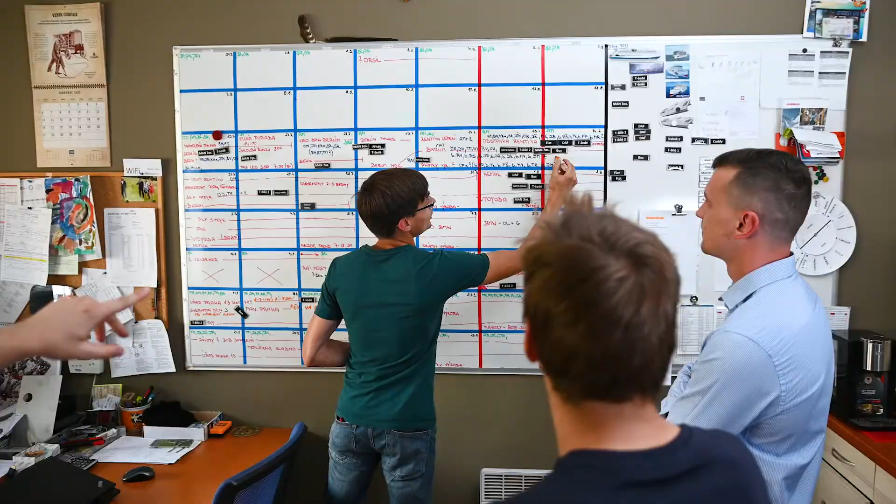We are Alkyon, a major European market player in the field of ventilation cleaning. We can handle any big project. We have a team of professional employees working in production plants, shopping centers, cruise ships. We can manage not only all these environments without difficulty, but certainly also yours.

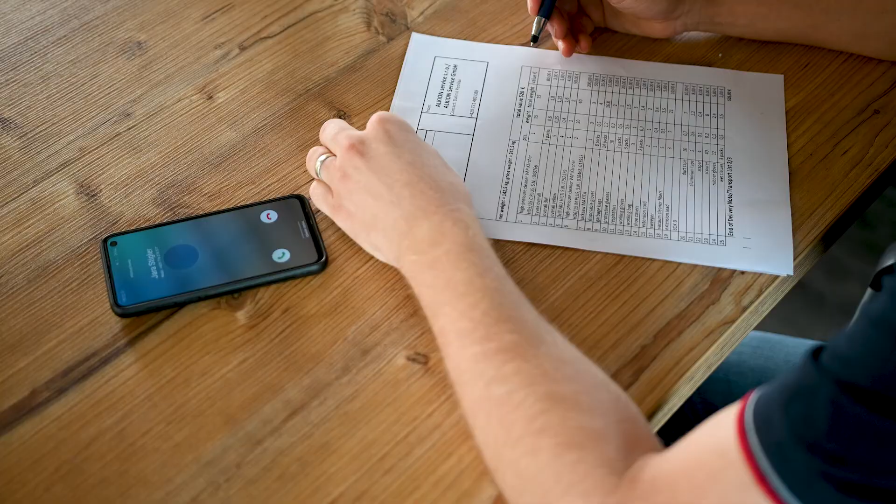We build on open communication. Every order and every project is planned very carefully. Your needs are our first priority. Thanks to the project management skills of our 5 teams, we are able to adapt effectively.

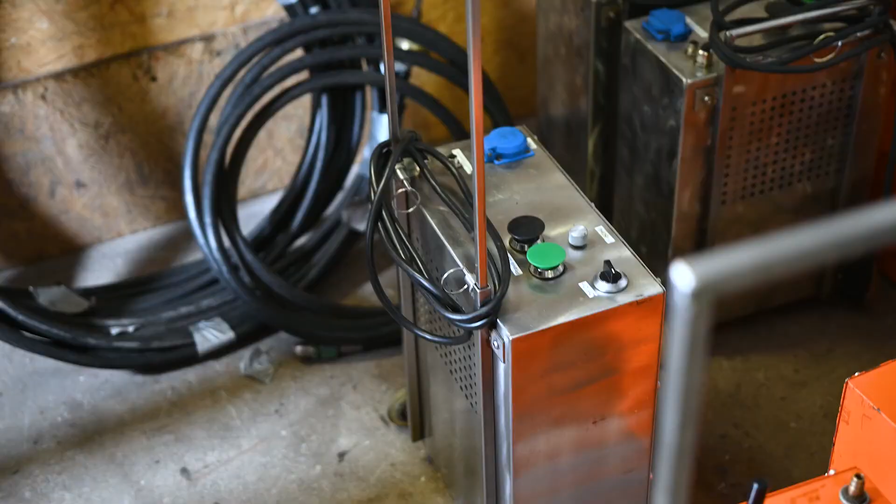We have a unique proposition that others cannot offer: extensive technical background, a diverse and broad range of special equipment, sophisticated logistics, a large fleet. These are the basis of our success.

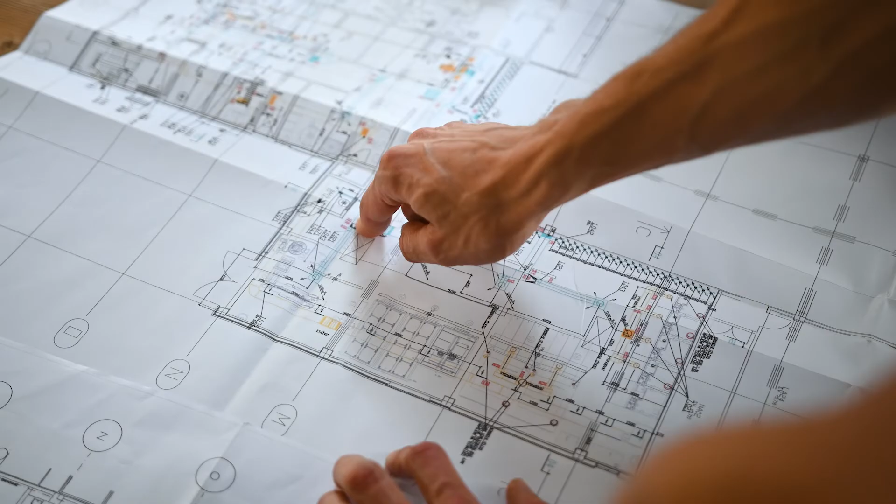Whatever your individual requirements may be, we can develop or alter our technology accordingly. Your needs are our priority. Your satisfaction is our reward.

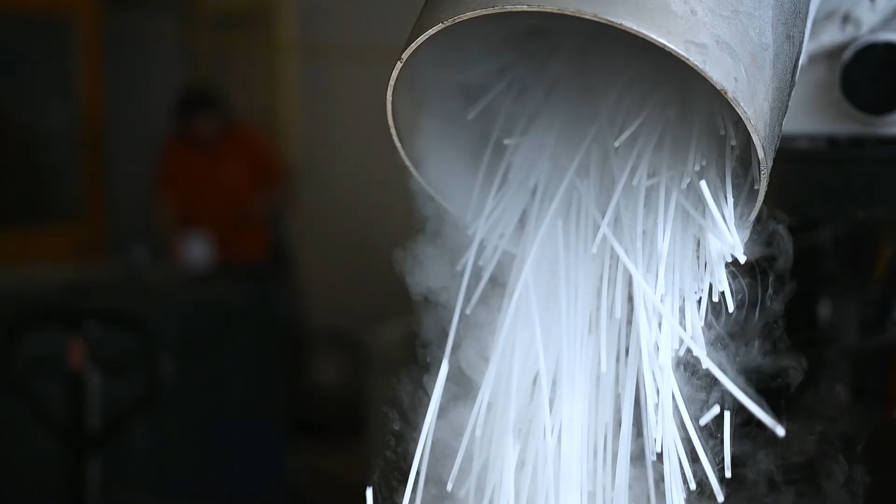We produce our own fresh, food-grade dry ice. We efficiently utilize it for our ventilation cleaning, but also supply our clients with it. We manage the entire spectrum of the various ventilation and duct systems.

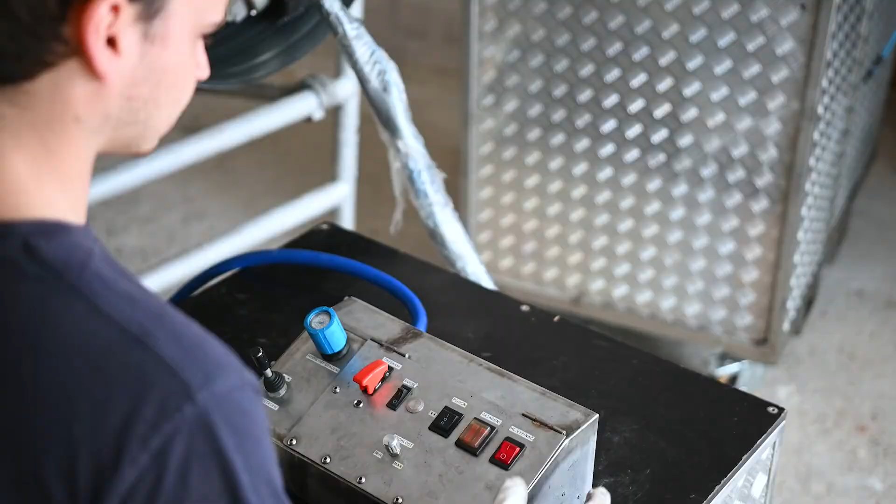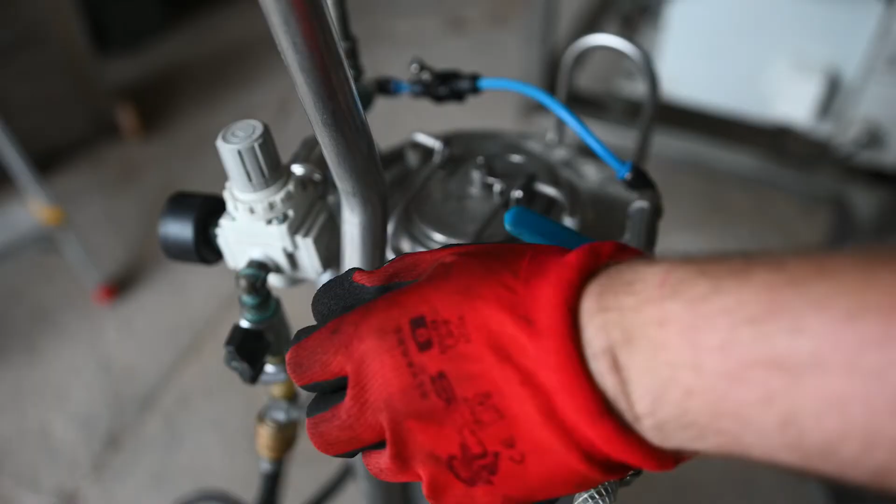We use state-of-the-art technologies: our own version of dry ice blasting robots, powerful rotating brushes, highly efficient disinfection applications, and our powerful extraction device sucking in and removing debris with integrated filtration.

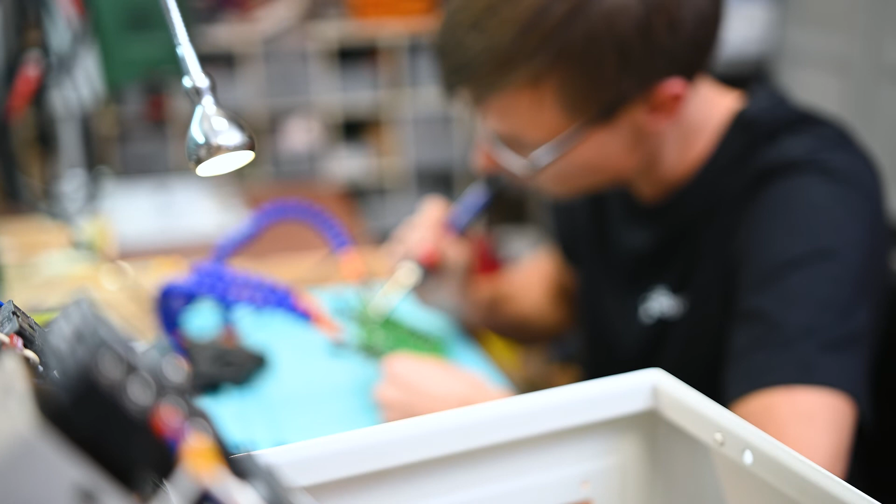We develop, build, test, improve. Our technologies, constructed by our top in-house engineers and technicians, are put to the test frequently and in the real environment. Our technology is among the world's best.

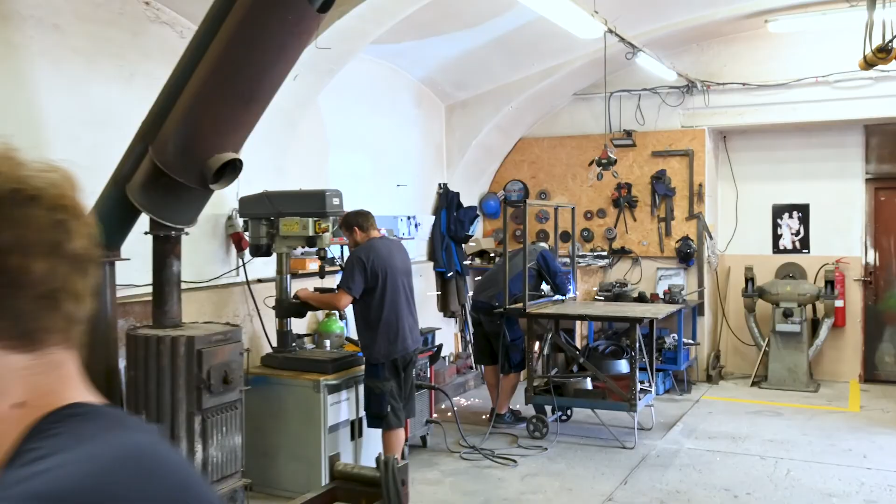We leave nothing to chance. Safety is our top priority. We have certified climbers in our teams. We provide regular training for working at heights and in controlling all the related equipment.

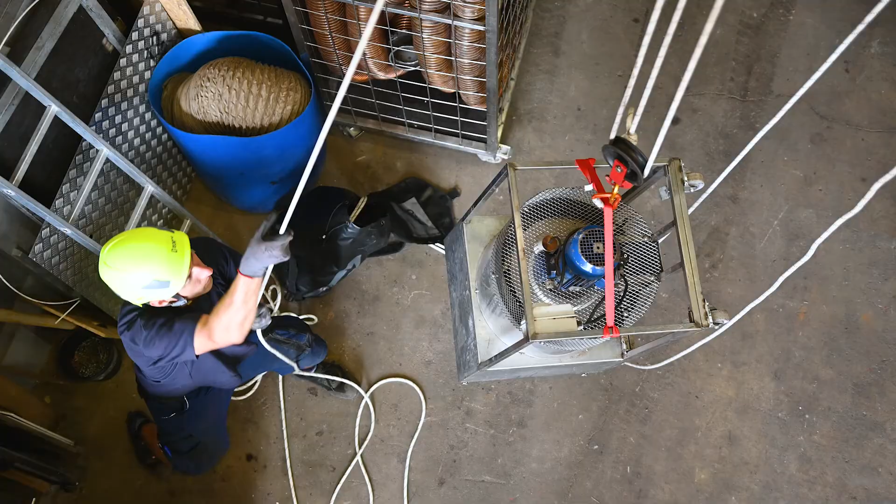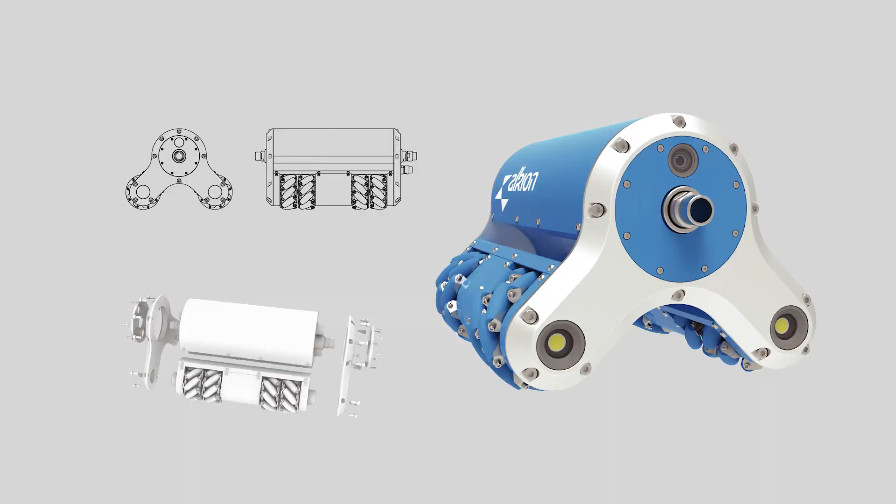We also cooperate with Czech universities. Together we create high quality and professionally new machine designs. We improve their properties and we create innovative visions for the future in ventilation cleaning.

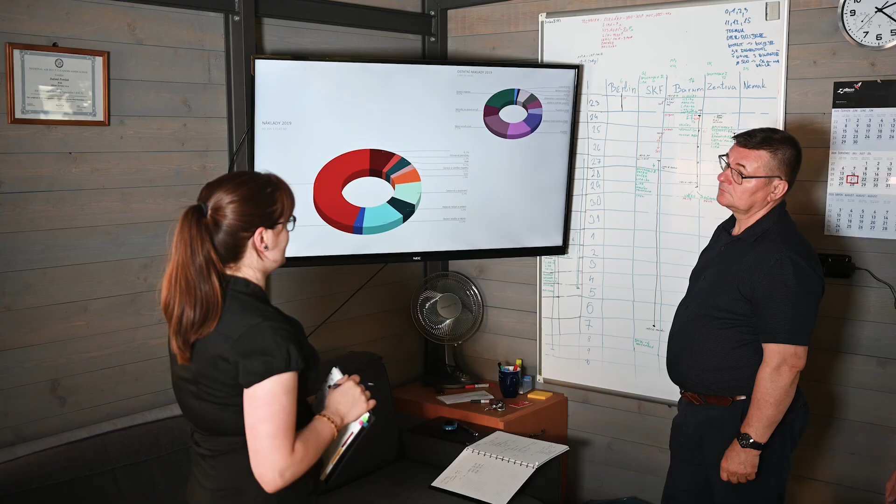In 2009, Luděk Petrilák and his son Dalimil founded the company Alkyon. Family atmosphere and trust determine the character of our company, even today, when we count more than 30 employees.

Our philosophy of exploring alternative or adaptive methods and practices has led to many new and successful results and will continue to pave our way forward.